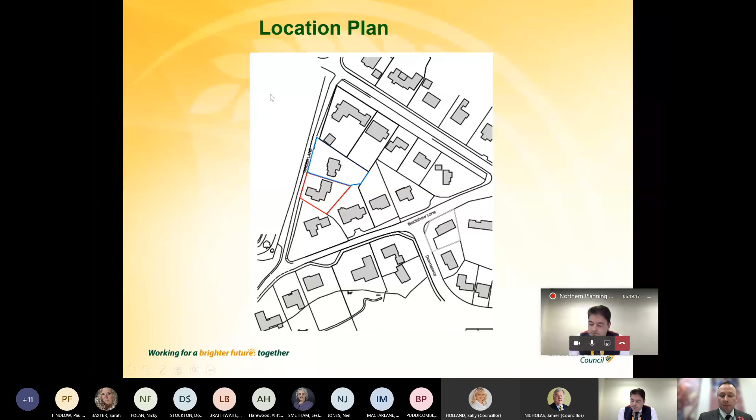I will start. Members, we're still in Alderley Edge, so we're actually towards the southwest of Alderley Edge, right on the periphery. Here we have the side garden area of a property known as Cornercroft, which is just within the predominantly residential area. There is Greenbelt adjacent on the opposite side of the road here. So just in terms of context, you can see the site edged in red.

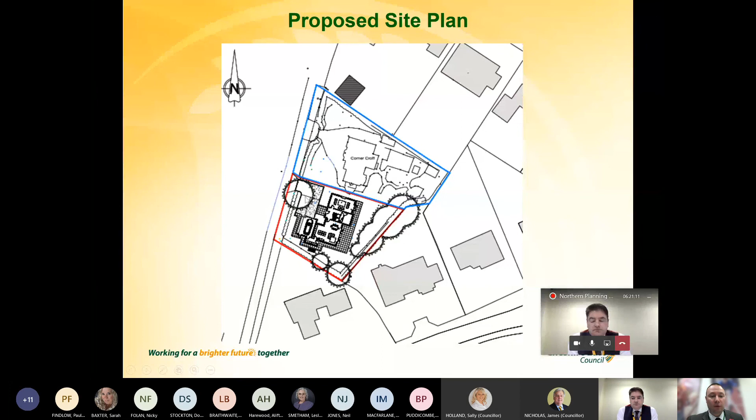So just for context, the two neighbouring properties I've just shown you are number 10 Blackwater and number 6 Blackwater. What you've got before you members today is a proposal to subdivide the plot and provide a new detached residential property to the side of Cornercroft, with its own access off Green Lane.

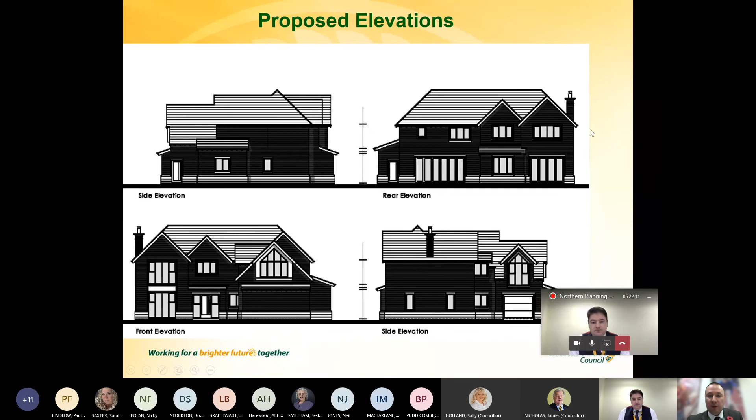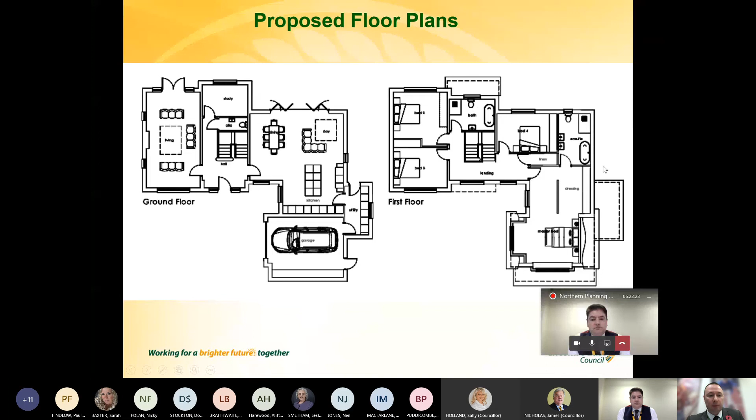This shows the floor plans for the proposal. It's important to note the side elevation facing those neighbouring properties hasn't got any principal windows, to avoid direct overlooking. This plan demonstrates the separation distances with those two neighbouring properties.

As you can see, given the offset angle of the proposal to number 6 here, 15.6 metres is sufficient to ensure no direct overlooking because they're offset from one another.

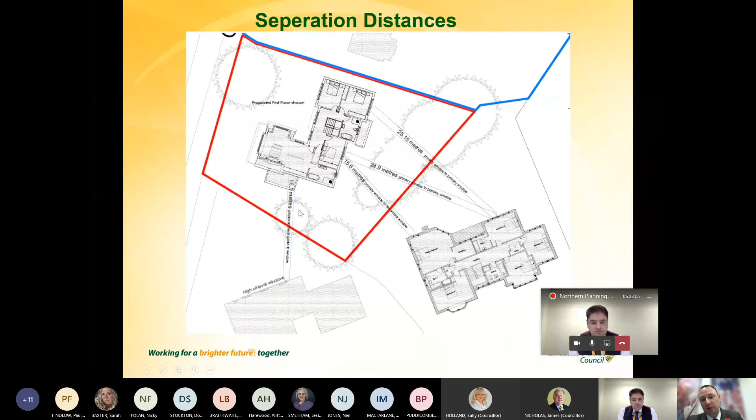In terms of the relationship with number 10, there are no principal windows that will be affected. There's a separation of about 11 metres there.

The application is acceptable in principle, being within a predominantly residential area. It's a relatively sustainable location, and the design is in line with properties found in the vicinity. Given the offset nature and the separation distances, there's an acceptable amenity impact, and the proposal is acceptable in highways terms also. On that basis, it's recommended for approval. Thank you, Chair.

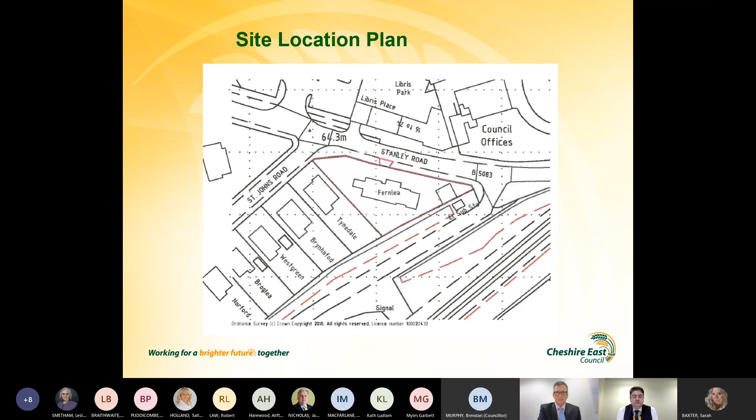Next slide, Sarah, please. Just to put it in a bit of wider context, you can see the application site, and to the north is the main part of the town centre. The application site is also very close to the train station, within walking distance.

So to the south east we've got the access road, then a row of vegetation, and then the railway line as well. Booths Supermarket is the larger structure located to the northwest of the site, on the opposite side of the road.

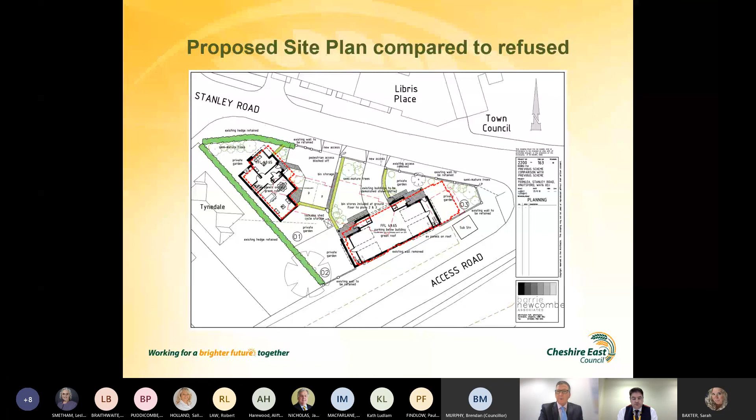The general form and design of the dwellings remains very similar to what was previously proposed. The amendments have come forward more as alterations to its scale and positioning, as you can see from this plan, particularly with the semi-detached properties just to the north of the access road, which have been moved quite substantially away from that prominent corner as you approach from Toft Road.

On the right hand side you can see the gap between the proposed black line and the dotted red line, showing how much it's been moved over from the previous proposal. The footprint has also slightly changed, narrowed at its peripheries, while the two features that project forwards have been slightly enlarged, all in an attempt to reduce the visual impact of the proposal.

Similarly with the detached dwelling, the change is probably not quite as pronounced, though it will be more evident in the elevations as we look at those in a moment. The two-story feature which sits on that prominent Stanley Road, St John's Road corner has been narrowed down slightly, again in an attempt to reduce its overall massing and visual impact from public vantage points.

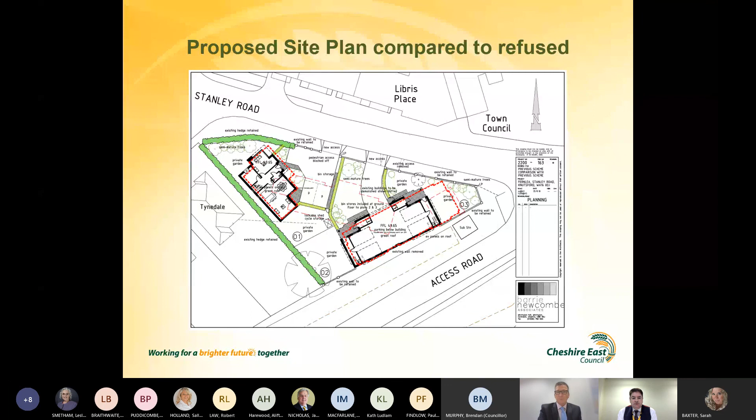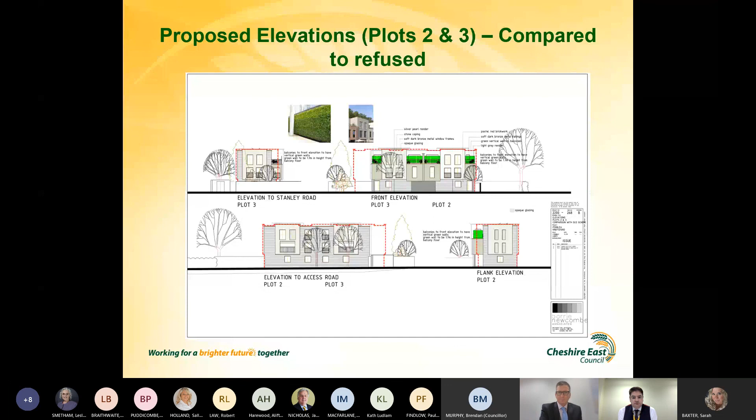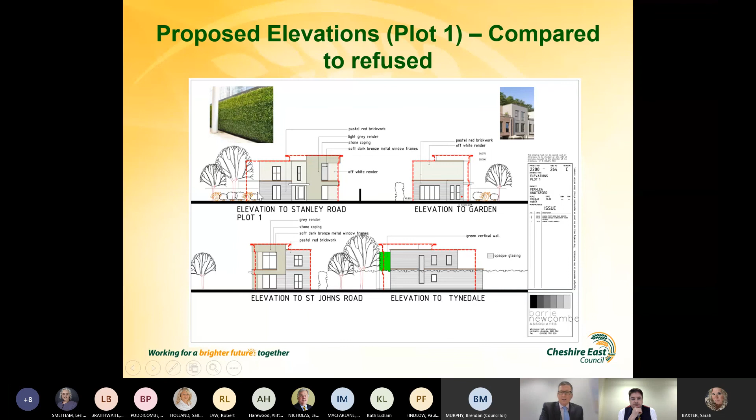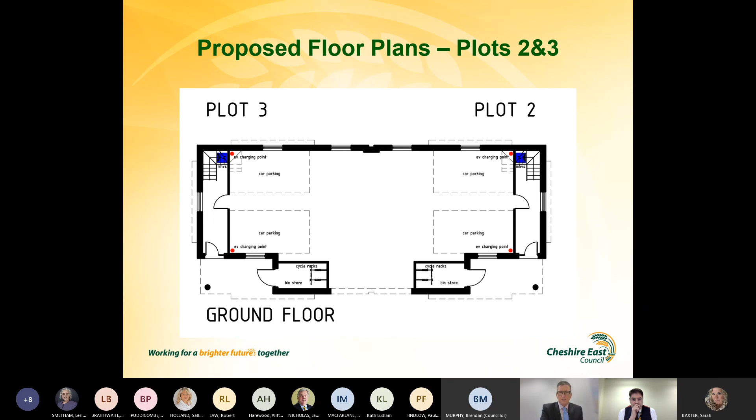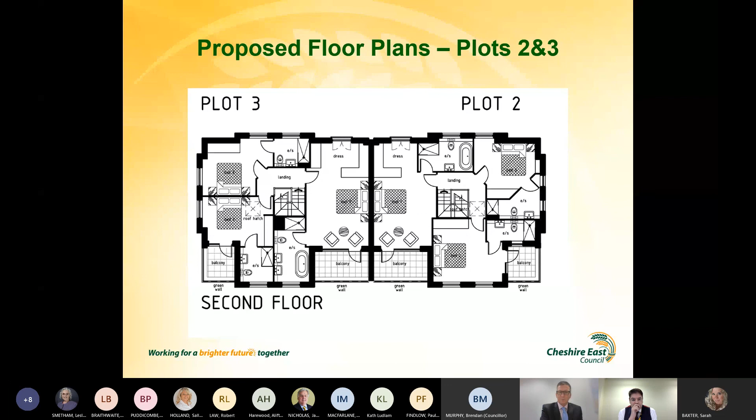Then again, first floor plans showing the general living accommodation, which you should have seen in the key plan. And the bedroom accommodation is at second floor level.

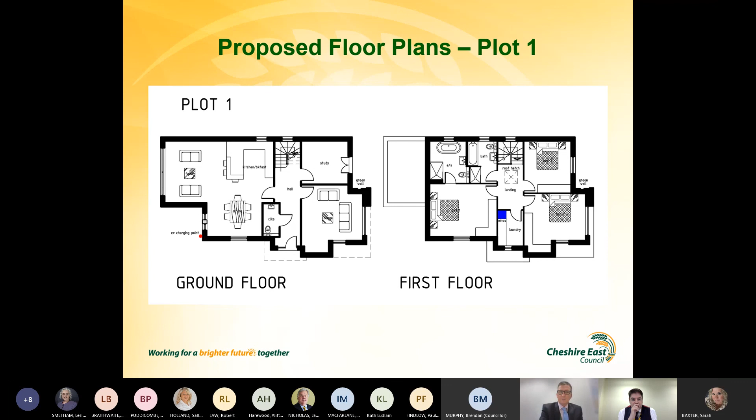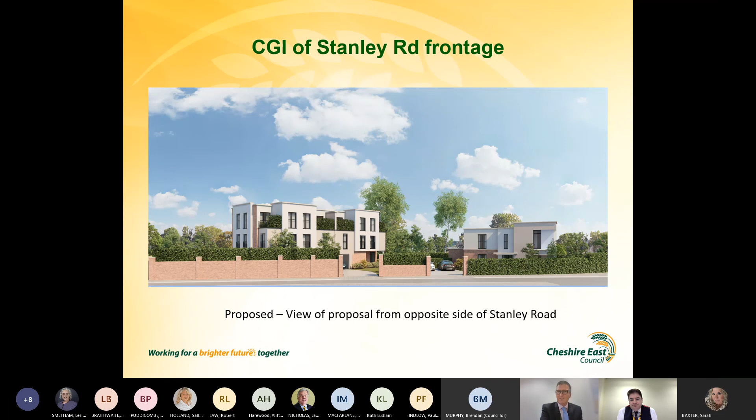And then that shows the proposal from the Stanley Road frontage itself. And is there a next slide, Sarah? Yes, there is.

And is that the last slide? Yeah. So it's a similar proposal to what we've seen before, but there are those key amendments that have been made, and for the reasons set out in the report, Chairman, it is recommended for approval.